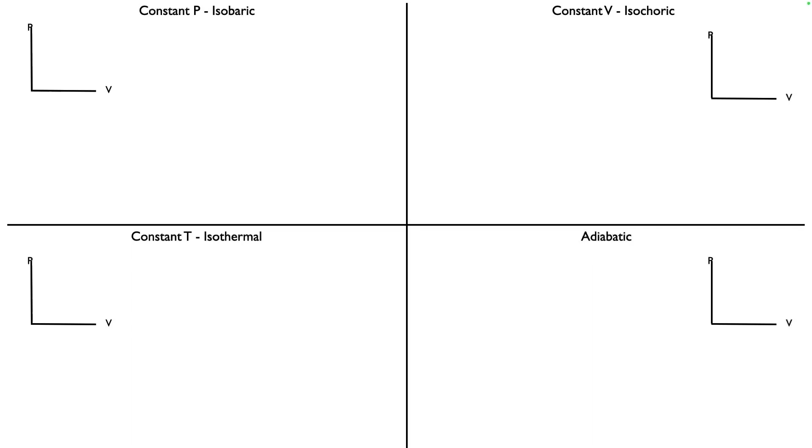So as this thing gets bigger, the volume could increase in such a way that the pressure stays the same, okay? The gas isn't being pushed down on. It's not free to expand as much as it wants, but we will keep that pressure a nice constant even value. On a PV diagram, that would look like a straight line across where the pressure doesn't change its value at all. What does change, though, and what has to change, is the volume. The only way to keep this pressure the same would be to vary the volume. If we kept this piston and we said, nah, this can't move, then as this thing expands the pressure has to increase in the system.

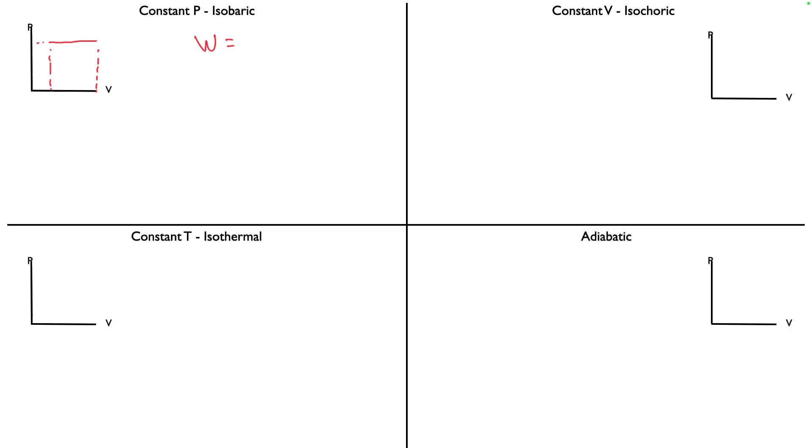Now, useful to us is the fact that the work that this piston is going to do on its surroundings is going to be equal to that constant pressure times the change in the volume. And so that means that we can write the first law of thermodynamics, change in internal energy of the system, Q minus the work, where the work will be the pressure times the change in volume. So this gives predictive power. If we know that a process is occurring and we're keeping the pressure the same, then we can find out how much work this system is going to be doing on its surroundings. It's going to be that pressure times whatever change in volume the gas has.

Okay? All right. Let's turn the tables here, and instead of holding the pressure constant, we are going to hold the volume constant. So that means that we are freezing this piston. We're like super gluing this piston into place, and it can't go anywhere. So tell me what the work is going to be if the volume of this gas doesn't change. Zero. Why is it going to be zero? Doesn't go up or down. It's not moving, right? Work is force times a displacement, isn't it? And so, since there is no change in shape of this gas, no change in volume of this gas, no work can be done.

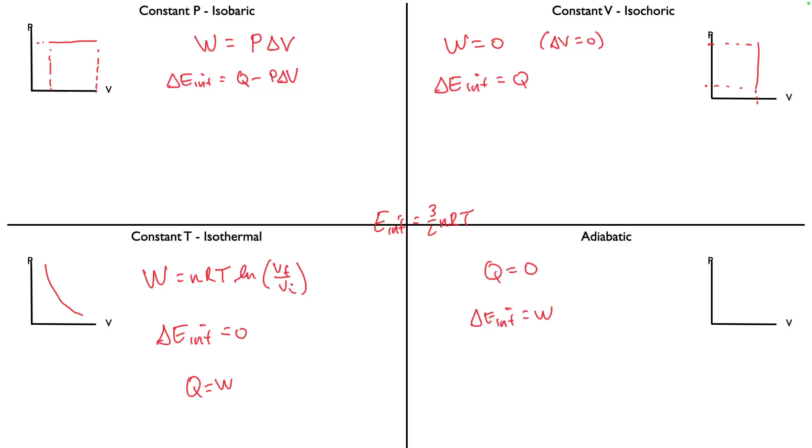And really the best ways to do that are get the insulation as good as possible, or have the process be as fast as possible. Because if you make something happen really fast, a lot of times there isn't enough time for thermal energy to get out of the way.

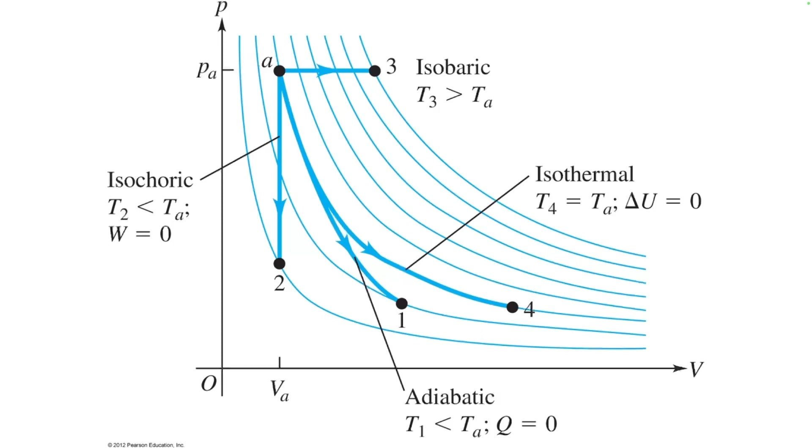Now, we're going to come back. The whole reason we talked about those is because I want to apply them to the concept of an engine, which we're going to get to in a second. But before I can talk about engines, we do need to talk about the second law of thermodynamics. The first law is conservation of energy. That's really what it is. In terms of things like temperature and work and heat, right? It's a recasting of conservation of energy.

The second law of thermodynamics is unique to the science of thermodynamics. And we're going to express it three different ways for our purposes. And the first is that it's an acknowledgement that heat really is one directional when it happens naturally. By naturally, I mean that we are not, as human beings, forcing it to go the other way according to our science. What do I mean by that?

Second law says that heat always flows from hot to cold. Spontaneous heat flow, natural heat flow, is always in the direction from hot to cold. So when you take your hand and you put it on, say, the window of your car when it's wintertime, right? You will feel the cold glass, right? And we often think of it as how the cold sort of seeps into us.

If you've ever sat on the snow for any portion of time, it'll just feel like cold is moving into you. But that is in fact not what is happening. What's happening instead? Heat is leaving us, right? Natural, spontaneous heat flow always happens from the hot thing to the cold thing, and never in reverse. Again, naturally, right? Allowed to follow natural law.

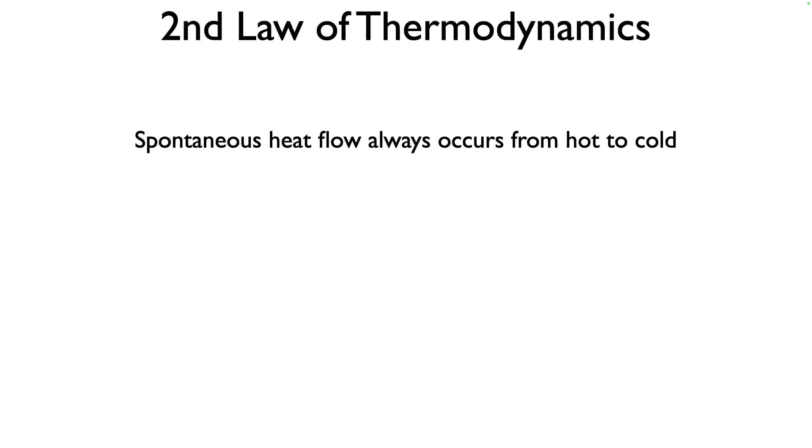And to cause energy to go the other way requires us to pay a higher cost in energy to get it to happen. But spontaneous or natural heat flow always flows from hot to cold. So with those two ideas in mind, conservation of energy and the relationship between work, heat, and change in internal energy, and the fact that natural heat flow always goes from hot to cold, we can talk about this thing in physics that we call an engine.

Now, I want to be very clear. We will get into specific types of engines today, like the internal combustion engine, and the real physically engineered engines. But before we get there, I want to introduce to you the concept of an engine. This is not how to build an engine. This is the theoretical background to what an engine does.

The whole idea of an engine is to get some kind of work out. We want engines to produce useful work, mechanical work that we can then capture to do other things, like move us around or run mining equipment or push airplanes around or whatever the work is. We want some sort of kinetic energy to be produced. That mechanical energy that moves things around. That's the goal of an engine. And thermodynamically, in the sense of burning fuels, an engine's job is to take fuel and convert it into that work.

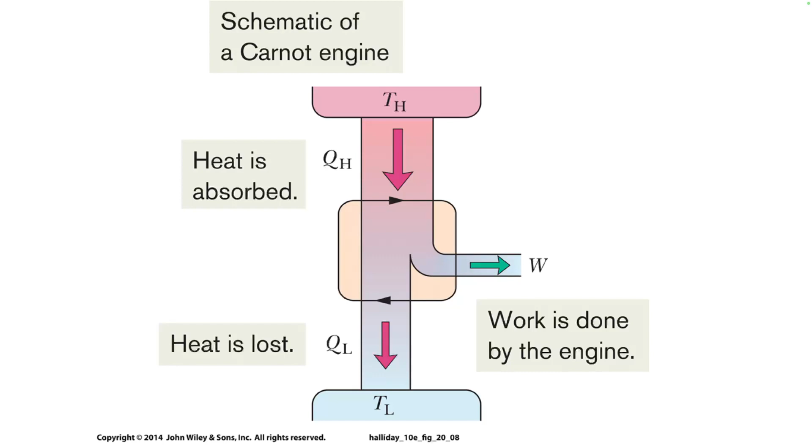These engines, the engineering design is sort of predicted or informed by those four processes that I was teaching you about. A thermodynamic process is going to be isobaric, isochoric, isothermal, or adiabatic. Those are the four things that can happen. But it's not just like an engine runs off one of those processes.

What you want to do is you want to link those processes together, and an engine by definition goes through a cycle that gets you back where you started. You want an engine to repeat itself. It's no good for an engine to just kind of fire once and be done. What we want to get out is a sort of harmonic system that repeats itself over and over again, and we capture that work that's coming out of it in a repeated way so that we can then repeatedly move stuff, right?

So a Frenchman by the name of Sadi Carnot, the Carnot cycle, he set out to figure out the best combination of these thermodynamic processes that would, A, get you back to where you started so you could repeat the process over and over again, and B, be the best, most efficient cycle that you could get. So it had to be the shortest number of steps, capturing the largest amounts of energy into work, and be repeatable, right?

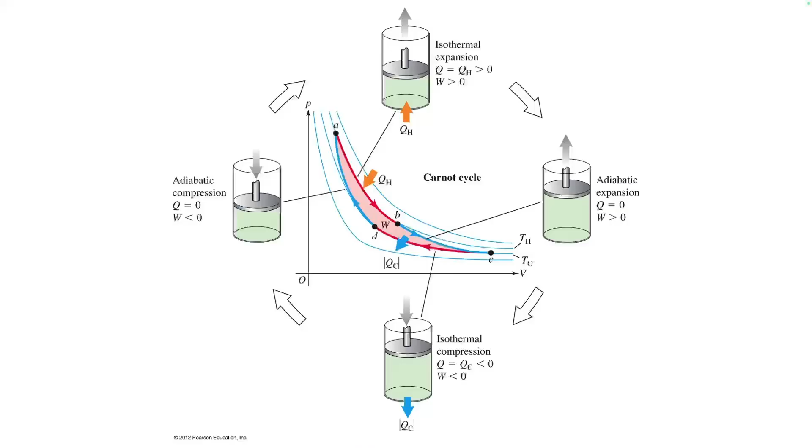Efficiency is a measure, okay, of the useful thing that you want divided by its cost. Okay, so efficiency is what you want divided by what it took to get there. In the case of thermodynamic efficiency for engines, what we want is work. We are trying to get work out of our engine. And what we're paying is that fuel cost in the form of the heat energy that our fuel is providing the engine.

So would this be done through, in terms of the engine, like through valves? Okay, so we're going to actually talk about the actual physical engineering here of your car's engine in just a second. What I want to lay down is this is the absolute theoretical maximum efficiency you can get in nature. The Carnot cycle turns out to be impossible to build with our current technologies and materials. Okay, but it represents the best case scenario for engines in their theoretical framework.

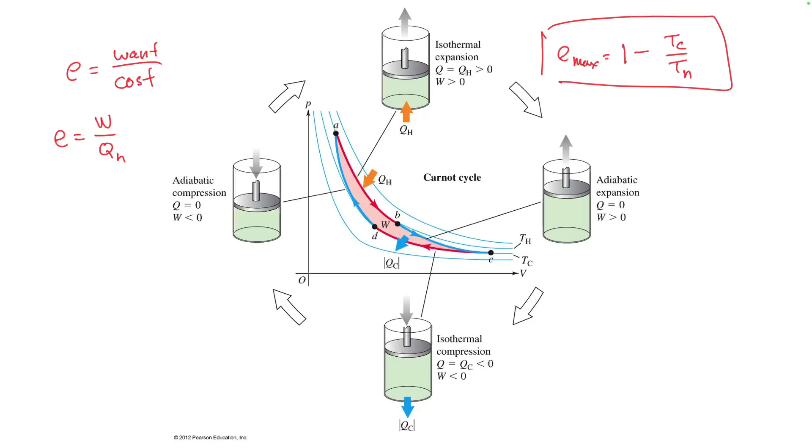So efficiencies go from 0 to 1. 1 being 100%, 0 being absolutely terrible. Okay, so to get 1 here, what must be true about TC over TH? It's got to be 0, right? So again, the temperature of the exhaust has to be absolute zero, which is impossible. Okay? Any other temperature besides 0 for TC means that there's going to be some little bit of efficiency, right, that gets lost.

So, what does this look like in your car? Well, your car does not run on the Carnot cycle. The reason cars don't run on the Carnot cycle is because it can be very difficult to actually get an isothermal expansion to happen consistently where you're not changing temperature.

It's also, the adiabat is a little bit less problematic, but it's still kind of problematic. This cycle right here is a different thermodynamic cycle. It's a different connection of the four processes that I taught you about. And it's called the Otto cycle. I love this. The guy's last name was Otto, O-T-T-O, but it sounds like automobile, right?

A-U-T-O. But the Otto cycle is the one that actually occurs in internal combustion engines, the engines that run your car. So if you have a gasoline-powered car, our system consists of a piston, a movable part, a fuel-air mixture, a gas, that is going to be the system that converts the gasoline into this work. The cylinders of the car's engine block.

And so what we have in your car, this varies from car to car, but in general, you have a valve that allows gasoline that's been blasted into a gaseous state, so it's liquid fuel that the carburetor, the fuel injection system in your car, pushes into a mist. And that gets drawn into the cylinder as the piston moves down. It just kind of sucks it in.

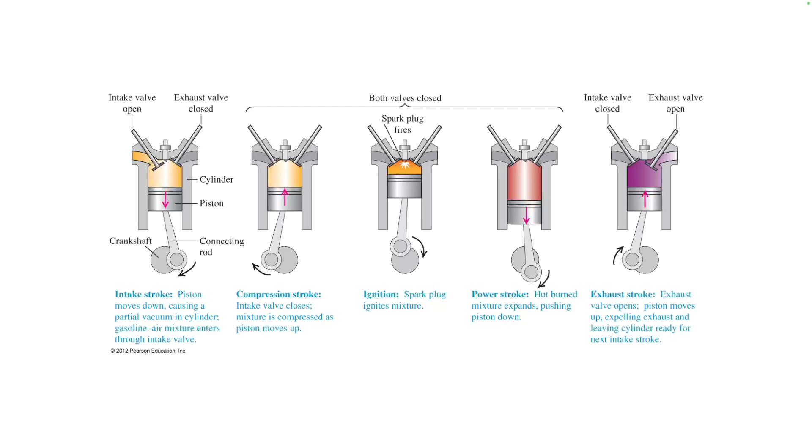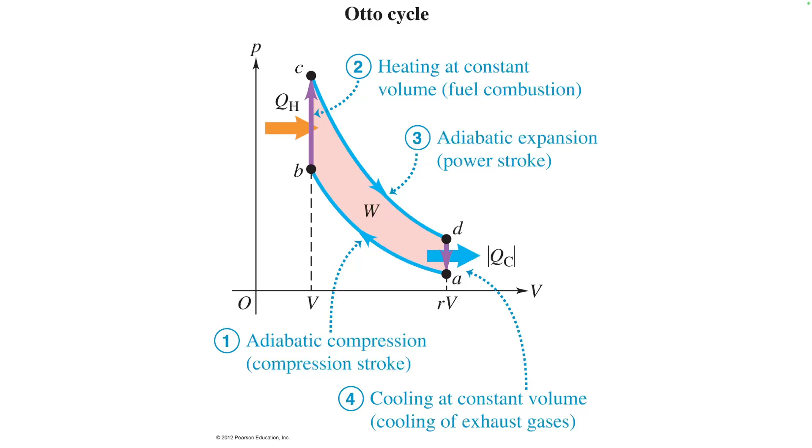We know heat's moving in or out, like the heat of the exhaust. The exhaust is being taken care of by the exhaust stroke, but your car engine just gets hot due to friction and the burning of these things. So it's not perfectly adiabatic, but it's pretty close because that power stroke happens pretty fast. Right? And all that energy, or as much energy as is possible, doesn't seep out through the engine during that fast power stroke. It's the residual leftover stuff that starts to leak all over the place.

So this efficiency that we're talking about when it comes to engines becomes very important because, I mean, who doesn't want to get the greatest bang for your buck, right? So let's just talk about the efficiency of internal combustion engines for just a second, okay? Modern internal combustion engines are among the most efficient engines that humanity has ever designed. Internal combustion engine, ICE engine, we've got 130 years of development under our belts for these kinds of engines.

The engines in cars nowadays are not the most efficient designs. You can actually get designs that are more efficient than the ones we have in our mass production vehicles. It's just they're finicky, and when they break down, they break hard, and it's just not great for a consumer experience, right? You don't want to have your car's engine rebuilt every 2,000 miles kind of thing. So there are tricks we can play to make them more efficient, but they're not necessarily more useful on a big scale. So at scale, the internal combustion engines we have nowadays are at best like 24% efficient. Anywhere from 18% to 24% efficient.

So let's put this into context, because it's important that you understand this. And in our society here in the United States of America, nobody understands anything unless we assign a dollar amount to it, right? Okay, money talks. So let's talk about the money you spend at the gas pump. And we're going to normalize this to $1. So let's say you buy $1 worth of gas. And to make the math easy, we'll say the engine in your car is 20% efficient, okay?

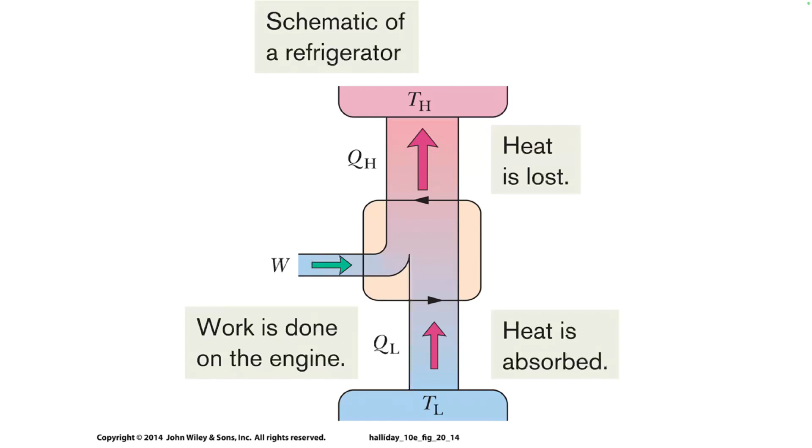Okay, so what's the reverse of an engine? Well, it's a refrigerator. An engine takes fuel, burns it, exhaust, work comes out. A refrigerator, the input is work. You put work into the refrigerator to cause a separation between the hot and cold sides. So theoretically, not engineering-wise, theoretically, a refrigerator is an engine running in reverse almost. Engines, we get work out. Refrigerators, we put work in to cause a separation of hot and cold.

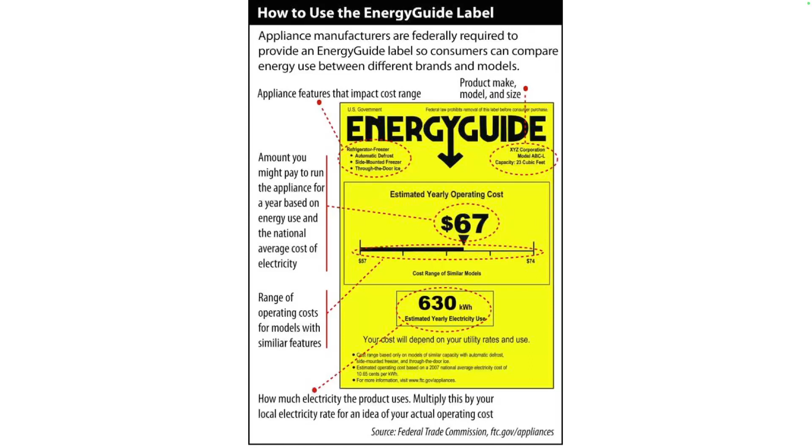So as a comparison between appliances, this is actually fairly useful, but as an indicator of what you will actually pay, it's not useful at all. Because what you actually pay for electricity is completely dependent on where you live, a bunch of other factors, okay? So do realize, right, that these labels are misleading in that one sense. This isn't what you're going to pay. It does not cost $67 a year to run a refrigerator. Could cost more, could cost less. But if there's another refrigerator there that has $40 on it, okay, it will over time cost you less than the one that, okay.

So how do refrigerators do it? It's taking advantage of the fact that when you compress or expand a gas, it will cool off or heat up. And so if we can get, right, high pressure gas to condense on the outside and then expand, that expansion causes it to be cold. And that cold, right, second law of thermodynamics, heat always moves from hot things to cold things. If we keep the cold side inside the insulated box, then anything warm you put in there will cool off.

That heat will be drawn out as the evaporator side expands, and then it gets recompressed. This is where the work going into the system happens. This compressor runs via electricity. When you are sitting there and it's kind of quiet in the kitchen, and then all of a sudden you hear that click, and then the refrigerator starts buzzing, that's the compressor working, right?

It's spinning, it's a little electric motor down in there, and it's compressing that gas, okay? And trying to get that high pressure side and dump that heat out into the kitchen area, okay? And then use the cold side to pull the heat out of the food that you happen to put in there. Refrigerators are nice, but they're only cold on the inside and hot on the outside.

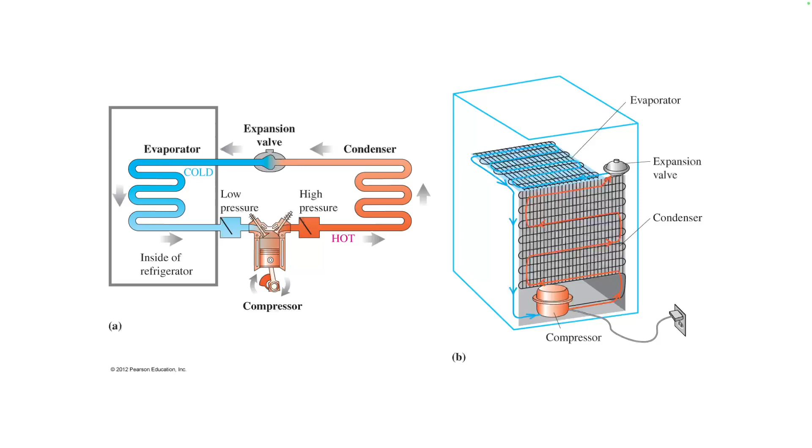An air conditioner is a house-sized refrigerator, isn't it? Only very, very important, where do we put the hot side? Outside, okay, right? So if you have an air conditioner on your house, you probably have it either up on the roof or maybe on the ground next to the house. There'll be that condenser, sometimes it's called. It's a big fan that makes big buzzy noises while the air conditioner is going, okay? That's the hot side of your air conditioner.

The cool side is somewhere inside your house, probably close to the furnace. The furnace doesn't run, but the evaporator coils are on the same unit, because the furnace is the blower that moves the air. It just doesn't turn the hot side on while it's in this mode. And so cold air is moved throughout the house, right? Whereas hot air is pushed to the outside.

A lot of times these devices, well, in physics we call them heat pumps. We don't really call them refrigerators. We call them heat pumps because you're literally extracting heat from one area and pumping it to another spot. Usually against the second law of thermodynamics. You need input energy into this system in order to cause this to happen.

The term heat pump is becoming more and more popular, especially here in the state of California, because gas furnaces were outlawed 4 years ago for new installations. If the furnace goes out in your house now, you are not allowed to install a gas furnace back into the house. The reason the state of California did that is, again, because fossil fuels and natural gas leaks in attics are very bad news, safety and all that kind of stuff.

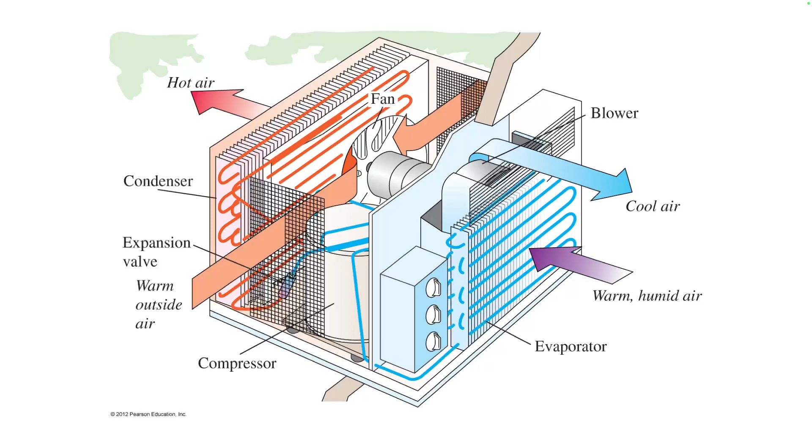So the second law of thermodynamics, okay? At its base level, spontaneous heat flow, natural heat flow, not human influence, changes of energy, always go from hot to cold. But another way to think about it is in this idea of engines and efficiency. Another way to think about the second law of thermodynamics is that a 100% efficient engine is impossible. You can get close, but it really is impossible.

So there's a third way to talk about the second law of thermodynamics. And it involves a word that if you've had chemistry, you were probably tortured with for too long. And that word is entropy. I'm just looking for the faces of horror as I mentioned the E word. What's entropy? Everybody's kind of heard it a little bit, even if you haven't had any chemistry.

Unpredictable randomness over time. It's disorder. It's a measure of disorder of a system. Things fall apart. Yeah. The example I like to use is of your room, right? I don't know what your living situation is, but let's just say you live in a room by yourself. You can clean that room up, right?

Entropy in chemistry, they keep track of the entropy of systems and so on. In physics, for us, it's more about how useful is that energy and what price do we pay for using that energy. And so another way to think about the second law of thermodynamics is that we always pay a price.

As soon as we try to organize something, take it from a state of disorder and put it together into a state of order, whether that's building a road, building a house, eating a candy bar. That's an organizational process. We're taking the calories from our food and we're turning them into cells and energy and ATP and ADP, right? That's an organization. But we always pay a price in disorganization, in waste, in energy that we can't use. And so it's almost like we are kind of always losing, right?

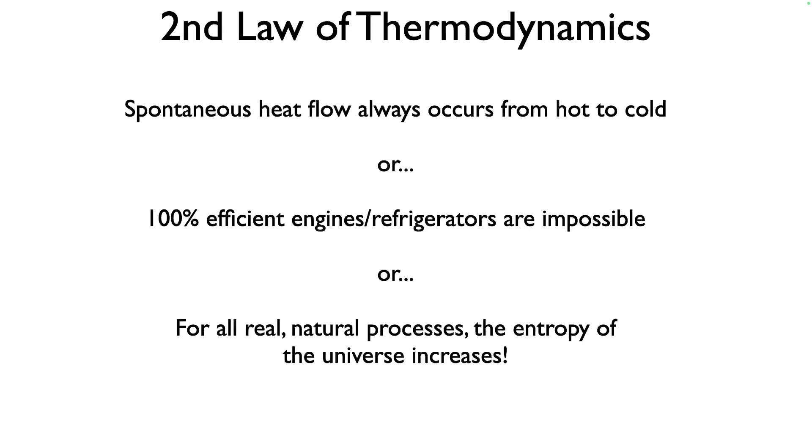The entropy of the universe always increases. In perfect processes, theoretically, it could stay the same, but it certainly doesn't decrease. If you see a decrease in entropy in a system, it's guaranteed that somewhere else paid a price of much higher disorder. But the good news is, no matter what, you're always going to be on the losing side. Because entropy always wins.